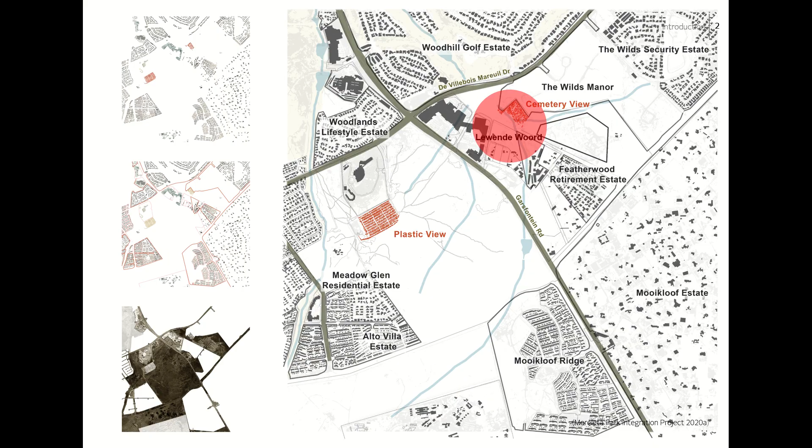The project is located primarily in Cemetery View, adjacent to the grounds where the Imvelo project is projected to take place. This provides a brief overview of the co-design methodology and tools used.

The list of limitations and challenges that was produced with stakeholders was used in conjunction with the stakeholders' projected outcomes and problems identified by community members in Quarter 1 to determine the main issues to be addressed. Group A was formed to respond to the intertwined issues of health, water and sanitation, and social development.

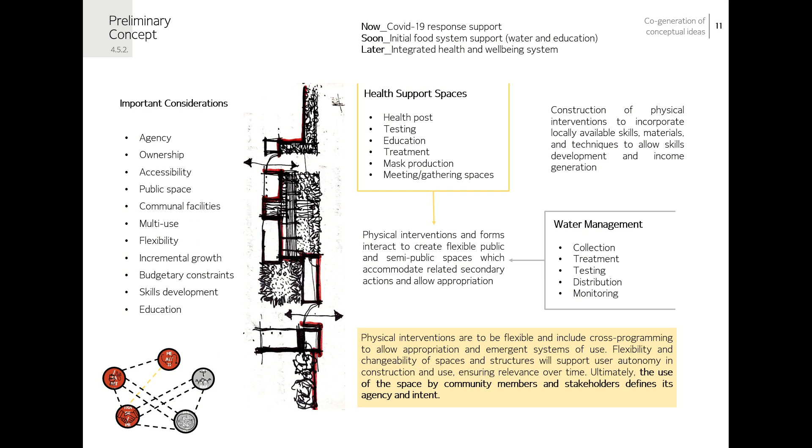The preliminary concept developed for the project related to health support and provision of public space, with an emphasis on ideas of ownership, accessibility, and spatial justice.

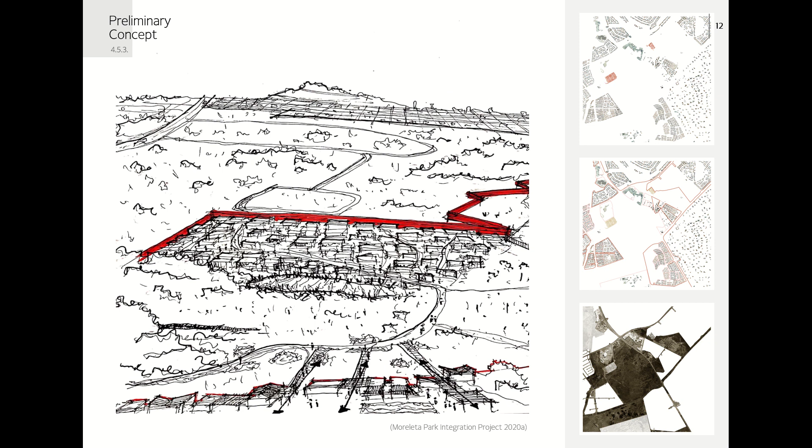It was important to respond to physical boundaries between Cemetery View and the Imvelo pilot project, to explore new conceptions of edge conditions and ensure accessibility for the community, an issue which stakeholders noted is important.

To this end, theories relating to the privatization of public space in South Africa, constructs of scarcity, and facilitation of spatial agency were explored. Additionally, in response to the ever-changing needs of informal settlements and flexibility required for stakeholder interventions, Tschumi's conception of event architecture was consulted.

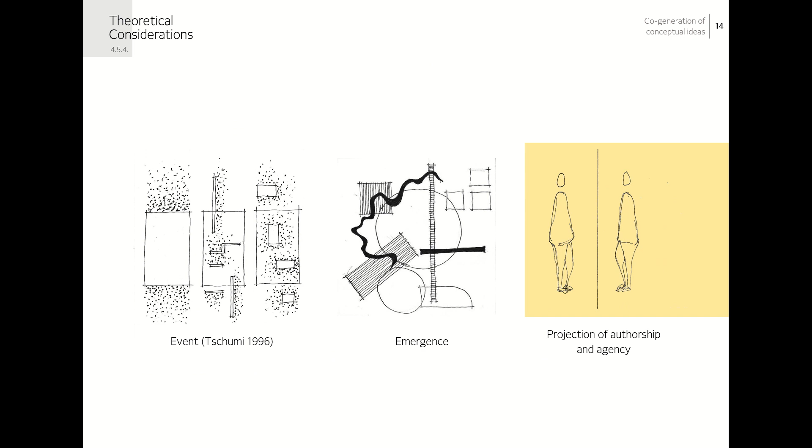This theory also surfaced important implications for agency and authorship within the design process. The next phase, co-evaluation of primary ideas, sought to evaluate the proposed concepts and their contextual possibilities.

The engagement methodology for this week used several tools to create a common design language to stimulate stakeholder input. 3 engagements were held with relevant stakeholders.

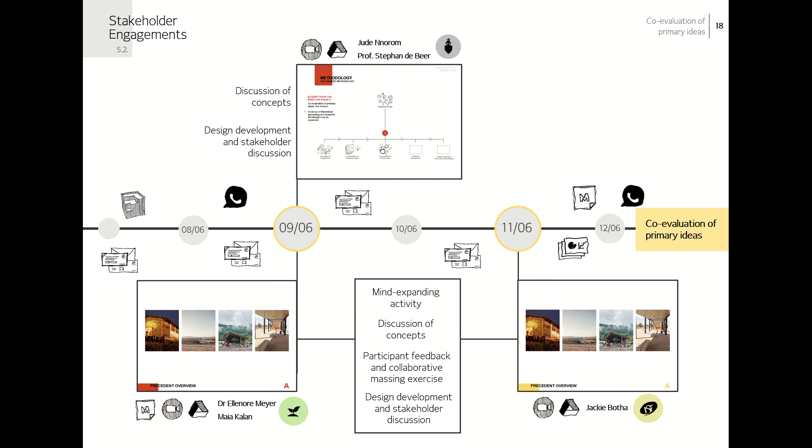During these engagements, precedent studies were used to expose stakeholders to the spatial possibilities available and create a common design language between them and the designers.

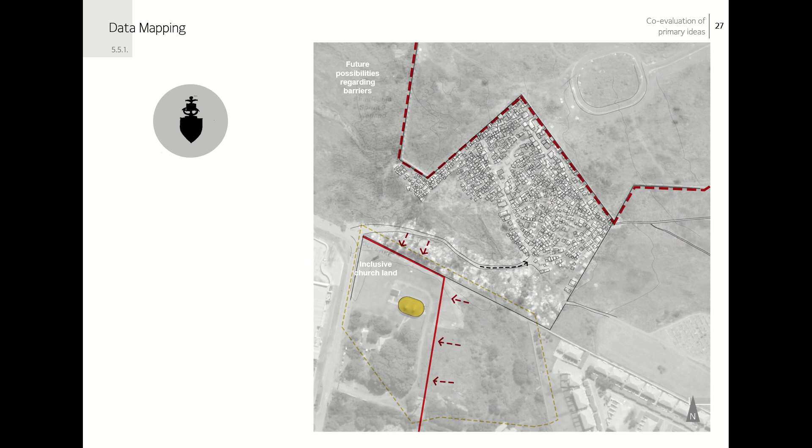Following the discussion of precedents, Mural was used to capture the spatial ideas of stakeholders on an aerial photo of the site. These ideas and proposed programs were then interpreted by the members of Group A in a separate Mural session. These inputs were then formalized on site maps and combined to identify overlaps and conflicts.

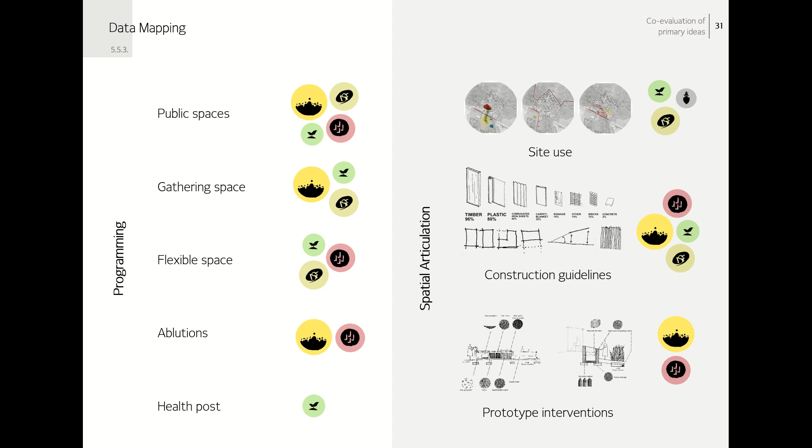In addition, the projected stakeholder outcomes were weighted and ranked, with emphasis placed on the community needs identified in Quarter 1. Next, the stakeholders' proposed programs were weighted, and additional sources of information relating to site use, construction guidelines, and prototype interventions were identified.

This information was used to propose a preliminary spatial intervention in plan and section with reference to the existing concept proposal.

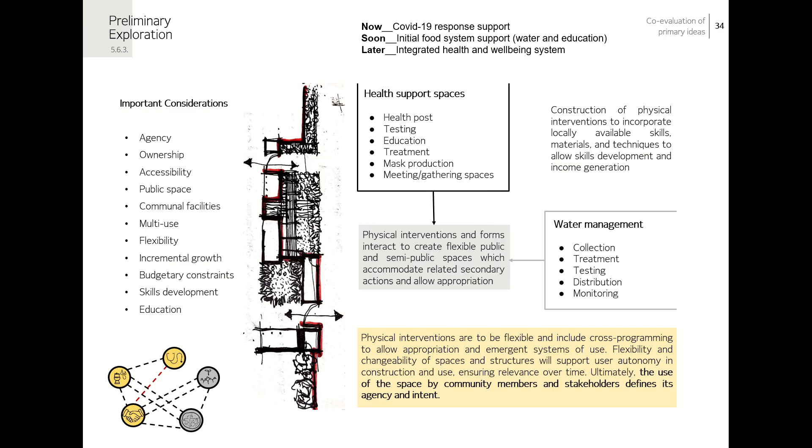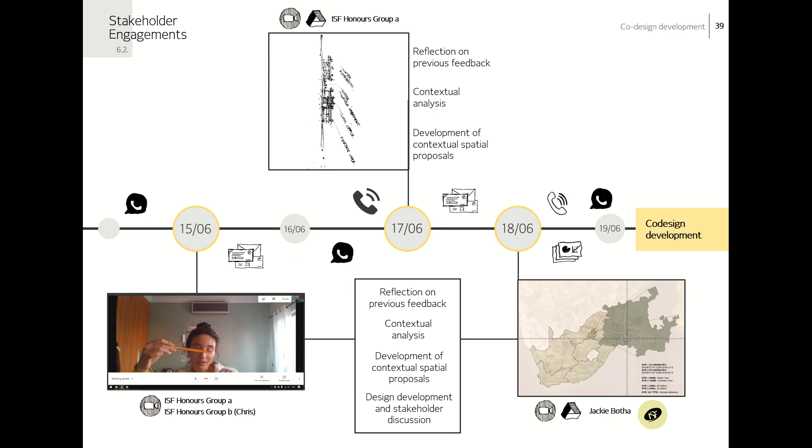Following the initial spatial proposal, contextual co-design development took place. This week focused on contextual analysis of construction within Cemetery View to enrich proposals. 2 peer engagements took place and 1 stakeholder engagement was held.

First, a scale diagram was developed to guide massing on site. Next, an in-depth analysis of construction techniques present on site was conducted. This was condensed into a summary diagram showing the predominant structural system within the settlement. The spatial proposal was then further developed with focus on construction and materiality.

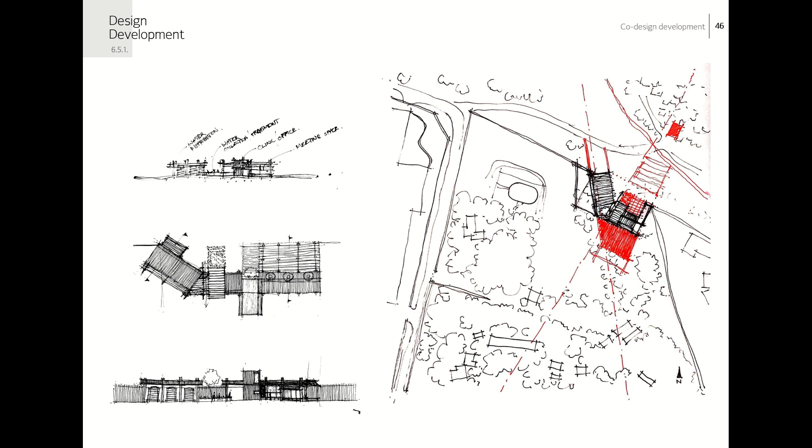An investigation of programming was also conducted and presented in the stakeholder engagement using an elevation diagram. At the end of this phase, the intervention had become fairly controlled and self-contained, at odds with the initial conception of an intervention which allowed flexible development and projection of authorship through use or event. This warranted further consideration, which brings us into the final phase of the process: revision of design.

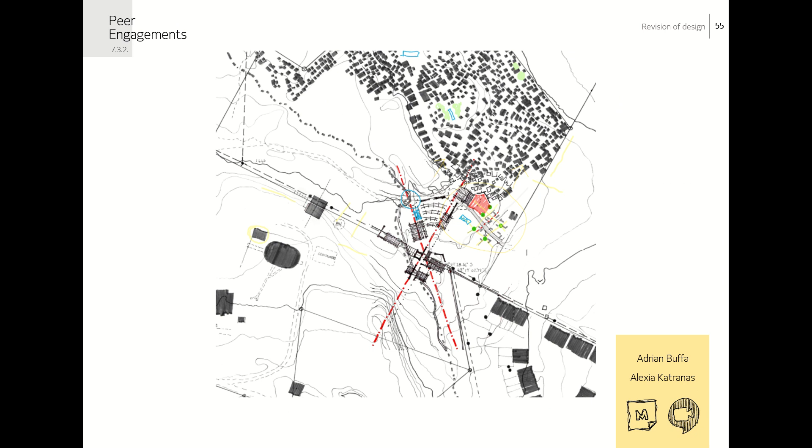This phase consisted primarily of peer review and discussion, as well as final stakeholder engagements. Three peer-to-peer meetings were held and two stakeholder engagements took place. Peer engagements consisted mainly of mural sessions, during which site plans were overlaid to identify overlaps and consolidate spatial proposals.

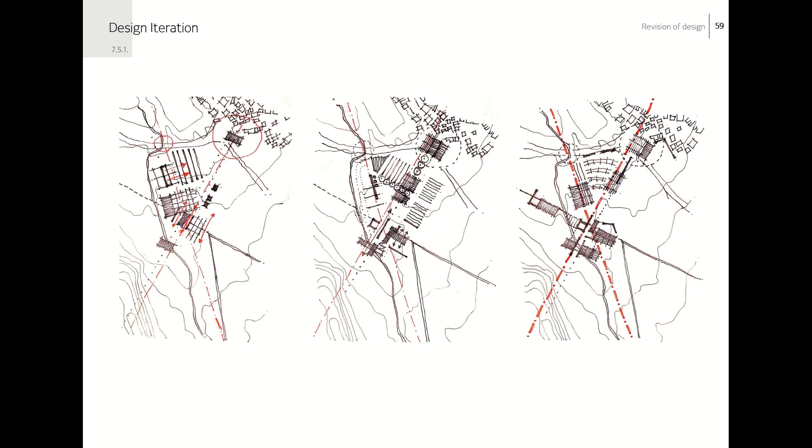Next, a personal reflection on the process took place, with emphasis on the theoretical framework, concept proposal, and the main spatial ideas extracted from stakeholder engagements. Several explorations were completed, referring back to stakeholders' ideas of a physical walkway, gathering space at the entrance of the settlement, and a health post to serve the community.

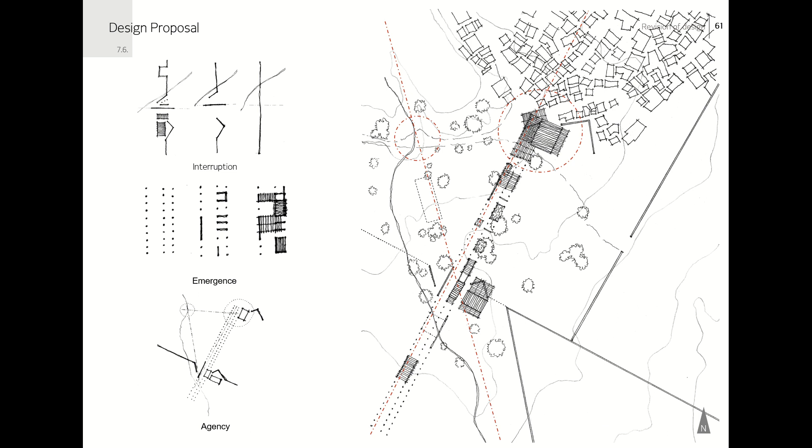These site explorations were overlaid in relation to the group's other proposed interventions, and a more refined site proposal was produced. The ideas for the scheme were to be developed in phases, responding to the conception of now, soon, and later.

Construction techniques within Cemetery View were examined again, and a composite structural system using locally available timber posts was developed. This system would allow flexible introduction and removal of cladding panels without the need for permanent fixing, resulting in interventions which could shift with the needs of the community.

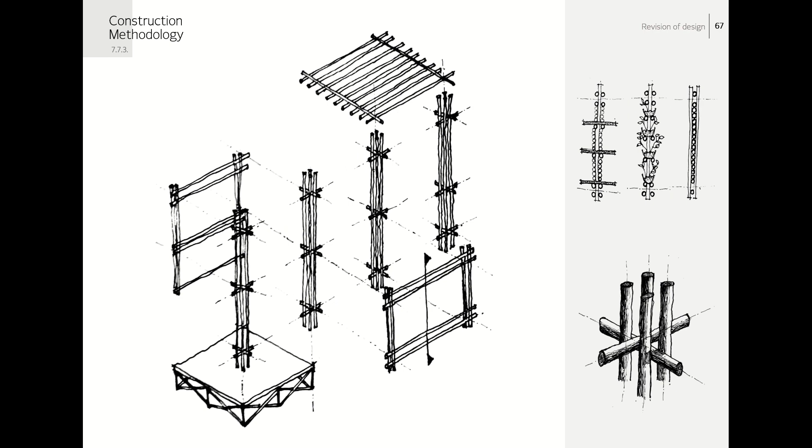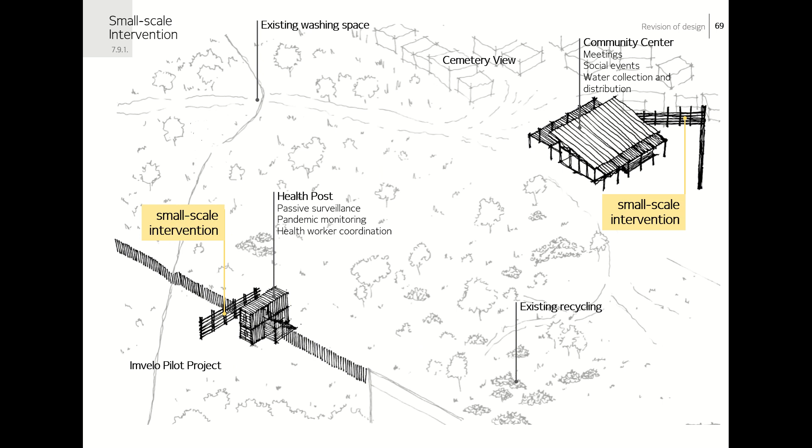The first phase of the intervention would consist of the collaborative implementation of a health post and the roof and floor of a community center using the proposed flexible structural system. In addition, two small-scale interventions would be completed in collaboration with the university's JCP Community Outreach Program.

These interventions would require the construction of a flexible screen structure to test the proposed structural system. University students and community members could collaborate to create screen panels using recycled materials to create patterns and planters. This would allow community members to explore the proposed structural system and experiment with different types of panels on a small scale.

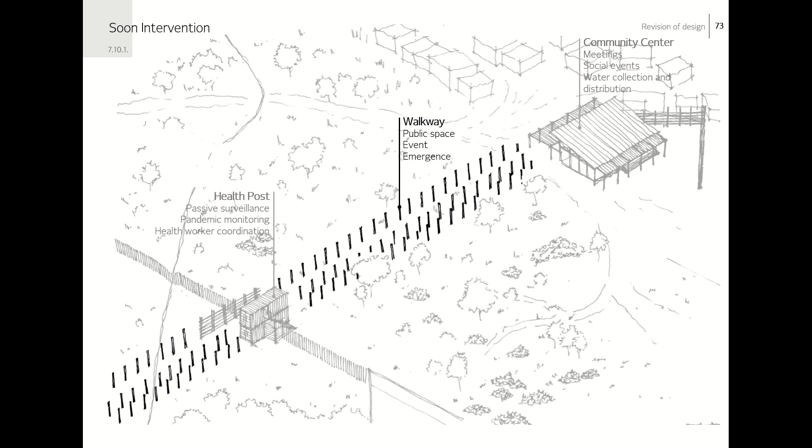Following this initial exploration, a larger structural grid would be laid out between Cemetery View and the Imvelo project, creating a physical link between the two. This framework could then be infilled by the community to create flexible, emergent public spaces which suit their needs.

Using stories describing the daily lives of residents within Plastic View and Cemetery View collected in Q1, possible user groups and uses for the walkway space were projected. Furthermore, aspirational stories told by residents were used to explore skills development and other opportunities within the spaces.

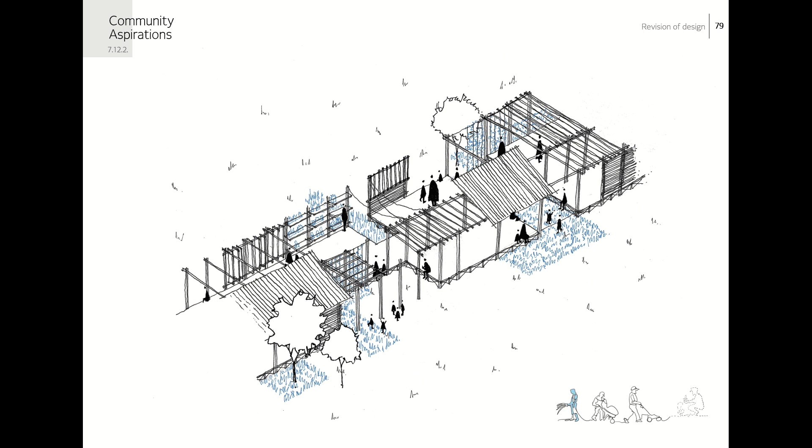The planter, who aspires to own a nursery, could implement growing spaces along the walkway and facilitate the development of a small-scale nursery for the greater Moreleta Park area.

The carpenter could create seating, shelving, and balustrades to support public spaces. These could additionally be sold, providing his business with the exposure and growth he hopes for.

Finally, the seamstress could create installations such as stage curtains and retractable shading to facilitate events and help reach her goal of becoming a fashion designer.

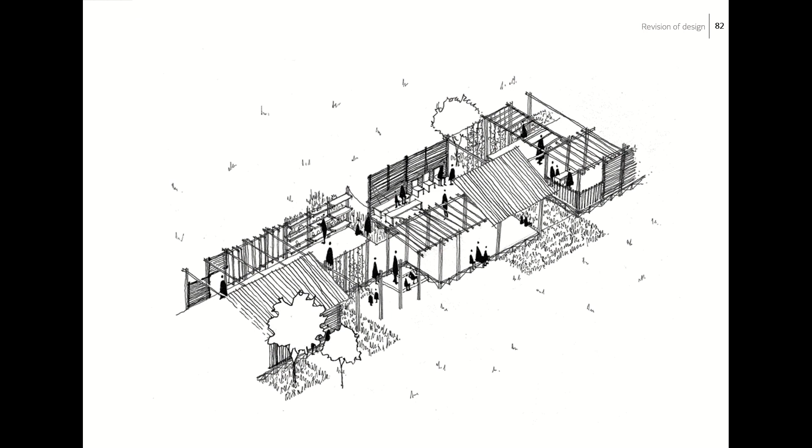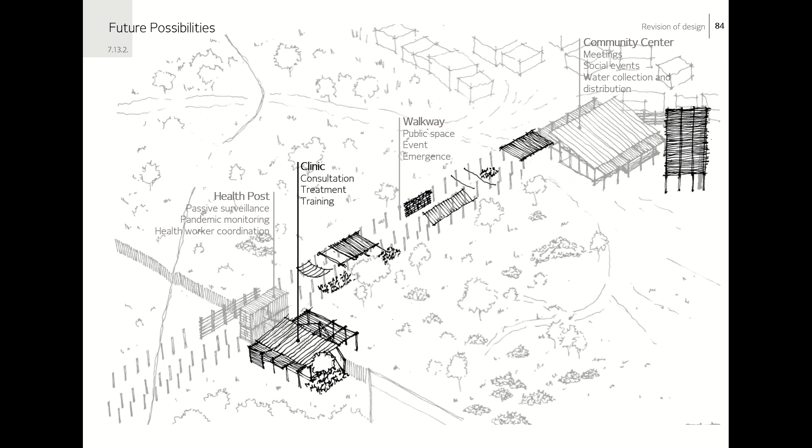It is hoped that the walkway could be used as a testing ground for residents to share skills and develop new construction techniques in collaboration with stakeholders. These techniques could eventually be used to construct and infill support spaces, such as a clinic or communal washing area, encouraging collaboration between stakeholders and community members. This would ensure that the development and use of the spaces remain in the hands of the residents who inhabit them.

To conclude, the intervention has shifted through the co-design process from a static imposition of formal programs to a flexible system which allows emergence and community-driven development. The flexibility of spaces and emphasis on dynamic use allows a transition of authorship from designer to user.

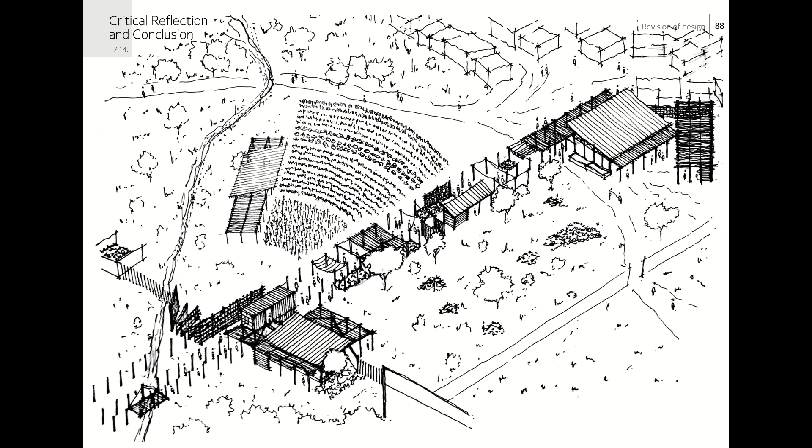Although the input of the community itself was absent during the initial design process, the construction, use, and appropriation of spaces ensures that the co-design dialogue continues throughout occupation. This may be a start to providing marginalized groups with a larger degree of spatial agency.